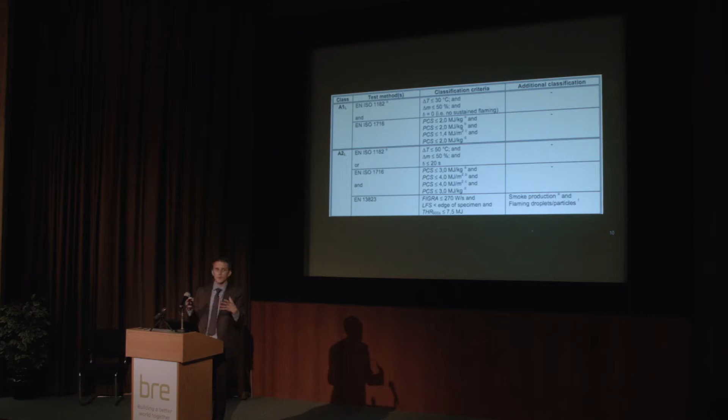So we have A1 up here at the top, and A2 down here, and this tells you the different tests you need to do to get your product to a certain classification. What you'll notice is that A2 has got an extra test in there, a corner test, an SBI test. The reason A2 has those additional categories is because there's an additional test conducted on that material. I suppose this illustrates that it may seem simple, we may look at something and think we understand it, but what's going on behind the scenes is potentially more complex, and we need to take great care before demanding or asking things, to make sure what we're doing has the appropriate technical background.

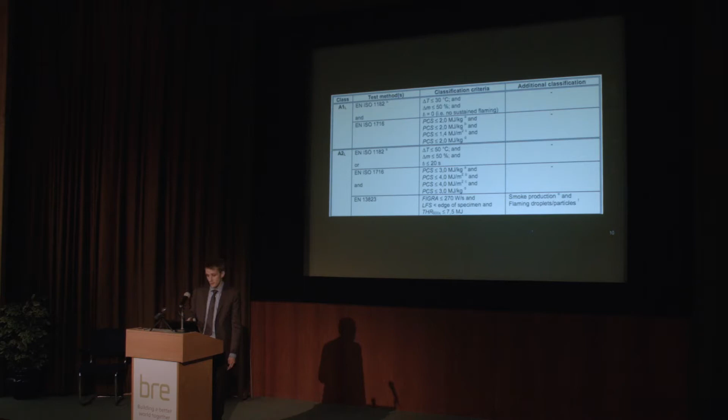But nevertheless, there's this distinction between A1 and A2, and it's essentially in this thing called the heats of combustion. The heat of combustion is the amount of energy a material can release when it's burned, so the number of megajoules per kilogram. The A2 material has an allowable heat of combustion of 3 megajoules, and the A1 material has an allowable heat of combustion of 2 megajoules. So you can see there's a difference between these materials.

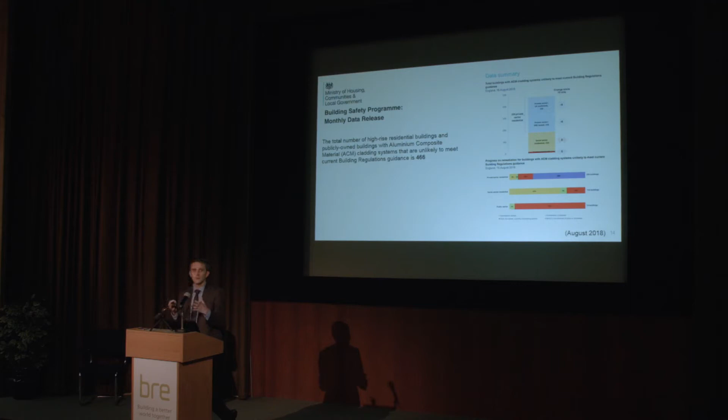So there's a big question, not necessarily on the new buildings, which is the argument currently taking place, but the existing buildings already built, which have all sorts of disparate types of cladding systems, maybe less extreme than those conducted as part of the DCLG tests last summer, but nevertheless don't meet the building regulations. What do we do with these buildings? I keep reading the press, and there are leaseholders subject to £40,000 worth of renovation work. Is that appropriate? Is that not appropriate? These are the kind of questions we really need to get a handle on to act in an appropriate way.

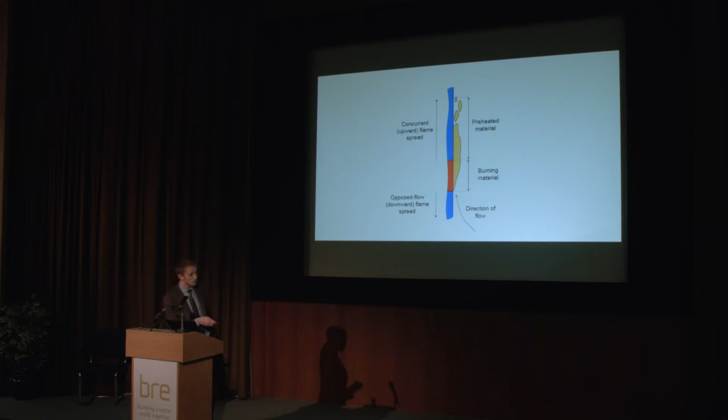We've got opposed flow fire spread, which is the downward fire spread on this diagram, and then we have concurrent flow fire spread, which is the upward fire spread. Those two types of fire spread are fundamentally different. One of them is governed by a very local condition taking place down here about how quickly energy is being transferred against the updraft, if you like, and the other is being driven by the preheating and the length of this flame as it's heating the material above it. That is a fundamental difference in behavior.

So really what we need to be able to do is understand - we want to know about the lateral flame spread, that's where a lot of classification testing comes from. But we also need to be able to understand this idea of vertical flame spread, upward flame spread, and what are the things that are controlling that?

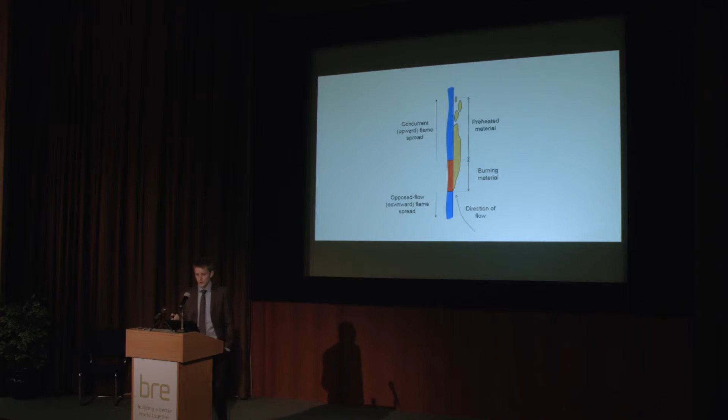This takes us to the kind of systems that we have been seeing a lot of recently - some very complex systems, build-ups of lots of different pieces of geometry, and I've simplified this down to the essence of what a common cladding system might look like. So you have some kind of existing structure, you overlay that with insulation, then you have a gap, an air gap to allow ventilation, and then you have the rain screen cladding sitting in front of this. This is what a lot of the debate has been about, and the different materials that are being used in these kinds of systems.

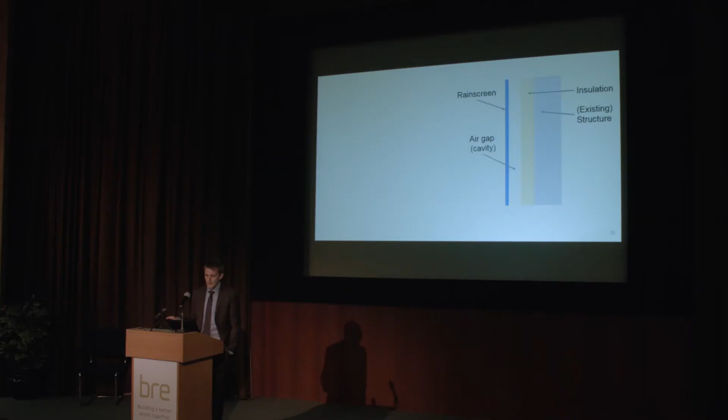So if we want to start understanding the performance of these systems, we have to start asking ourselves lots of questions about what are the things that might impact upon the way that system may or may not behave. Questions we could ask: what is the influence of the width of the cavity? If I was to conduct a BS8414 test, and I had a 50 millimeter cavity, and then I want to change to a 60 millimeter cavity, is that important? Does it matter?

Do I need to go and retest, or is my result fit for purpose as is? The location of the gaps between different panel assemblies, does that matter? Does it have an influence? The thickness of the different materials - if I change my insulation thickness, if I change my rain screen thickness, is that going to have an impact? The types of materials I'm using, what they're made of, is that going to have an impact? The combination of materials, how I put them together, does that have an impact? The fixing of materials, the mechanical way these systems are put together, does that have any influence on the overall fire performance? And Octavian was talking about cavity barriers a moment ago - the location of the cavity barriers and the way they're put together, does that have an impact on performance? There's a whole range of complexity in these systems that we need to understand if we're going to ensure relevant and appropriate application of test results. So this is where our research came in.

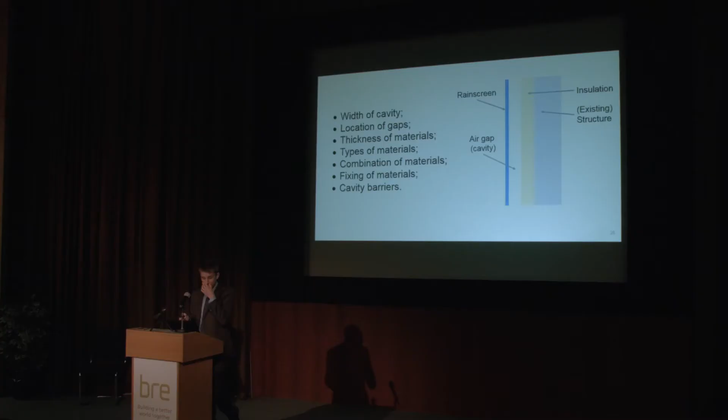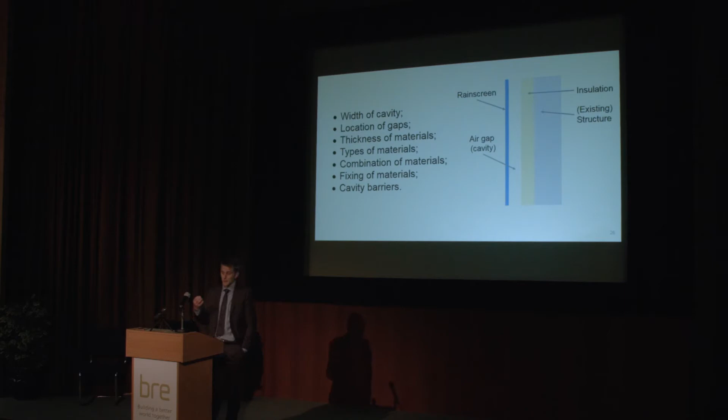We've been doing a lot of work in the lab. We have a lab up at Edinburgh, we have a furniture calorimeter, and we can do medium-scale experimentation - we've been doing that for a number of years on these kinds of materials. But really what we wanted to see is what's going to happen at the slightly larger scale. So I want to share with you some of the work we've been doing, so you can see the kinds of things we're pulling out from this research.

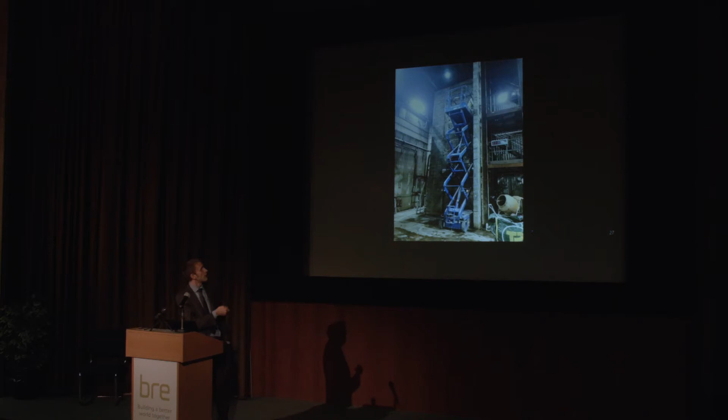We did the work in two phases, one in January, which was very cold in the burn hall, and one in May and June, as a team of 8 people came down for this research. We used this BS8414 rig as the basis for the start of our experimental build-up. We all learned how to drive a scissor lift, so I'm now a qualified scissor lift driver if you require any assistance.

We took a modular system - we created a framing system that we could mount lots of different combinations of material to, and we mounted this onto the wall. So what you can see here is the first of the frames going up. We did have a time lapse of this, but it's a little embarrassing because you can just see us forgetting our tools and having to go up on the scissor lift the whole time, so I decided not to play it. We can start to mount this system on the wall.

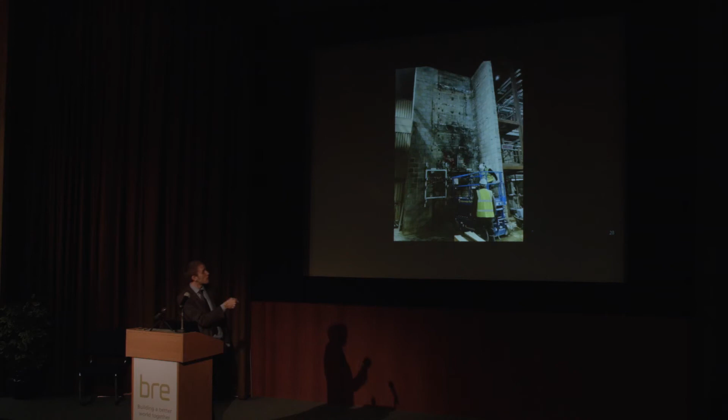David Farrington was delighted that we drilled a series of very large holes in his wall so we could fit our instrumentation through. This is the instrumentation going down the back of the rig behind the wall. We had around a little bit more than 200 sensors across the whole array. This is looking at it from the side - you can see each of the modules going up the height of the wall, and there's an absolute tangle of cables and tubes sitting behind the wall, feeding our equipment.

Then what we've done is overlay a sheet of PMMA onto that. Those of you who've done fire labs in the past will know PMMA well - it's plexiglass and is a very well-studied material in terms of its properties and how it burns. We wanted to take something we really understood how it burnt, but put it in a situation that was quite extreme. Then we ignite it at the very bottom, using the smallest ignition source we could get away with and still get an effective ignition - just a strip of soaked ceramic paper, soaked in heptane, so a very small ignition source.

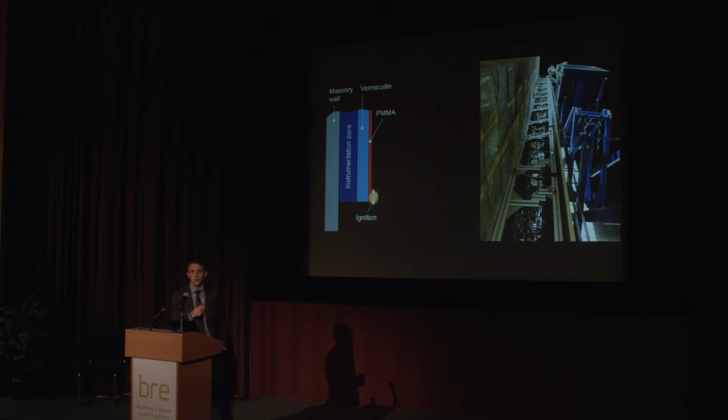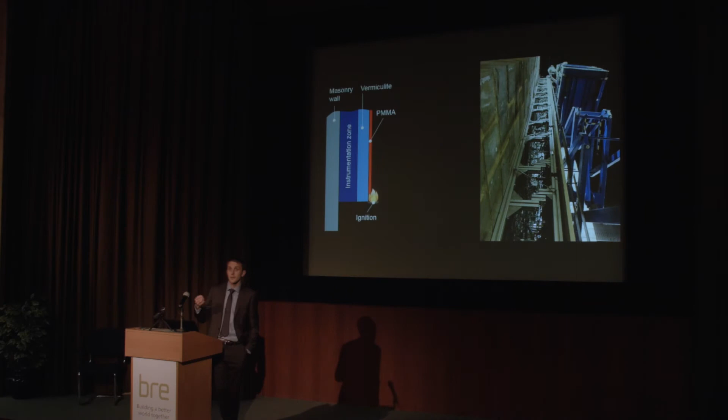So what I'm going to play you now is a video. It's worth saying that this system does not look like a cladding system - PMMA onto the vermiculite board does not look like a cladding system. What it gives us is a baseline. A lot of the experimental research previously conducted in this area really looks at fire spread on a single surface. So what we wanted to do is the kind of thing people normally do at 1 meter scale or 300 millimeter scale, but do it over 7 meters in order to get a baseline for the behavior of a very simple system, which is what we did. So hopefully we'll play a video.

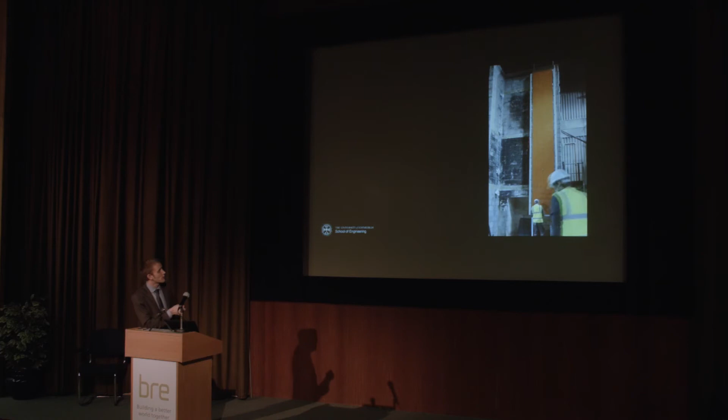What you can see here is actually the other rig, because this was the one in January where we occupied the other wall, but it was exactly the same system, just inverted. And I'm pleased to say there were no funny symmetry effects on this wall. We measured that, so we're very happy that we had a symmetric experiment.

So we've got 7 meters of PMMA. Each one of those is an individual panel that's just 1 meter high, and you can see there's a little black thing there. That's actually a pressure probe that's measuring velocity of the gas directly in front of the panel.

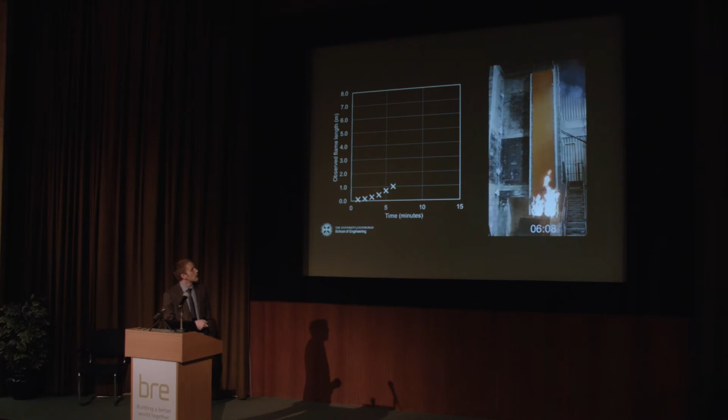So what you can see down here, 2 minutes in, 4 minutes in, we've got little flames at the bottom, and it's starting to get a little bit bigger over here. What we have here is the observed flame length, just eyeballing this from the video, and you can see the growth rate. Now we're reaching up to about 1 meter, 1 and a bit meters, I guess. And what you can notice here is you're starting to get an accelerating curve.

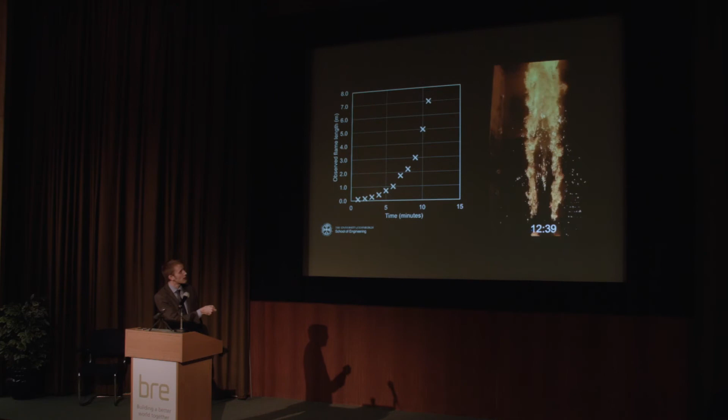By this time you've got ignition of almost the whole height, but not quite. And then you've just got this little bit at the top that's then igniting towards the very end there. What you can see at the bottom, we only have a 6 millimeter thick piece of PMMA, so at the bottom it's burning out, and by 12 minutes 39, you've actually had burnout across almost the entire height, except at the edge where it was restrained to keep it all in place.

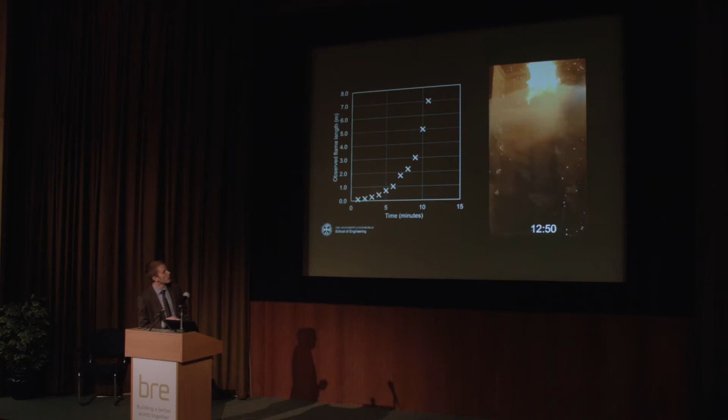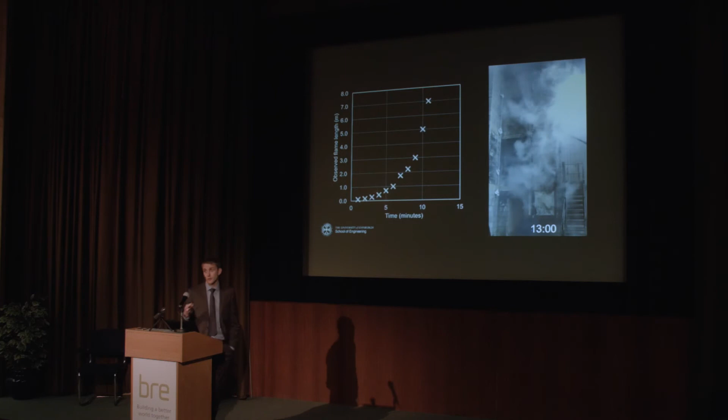At that point we got a little bit nervous about the roof of the burn hall, so we put it out. But what you can see here is exactly what you'd expect based on the fundamental theory of flame spread, in that we have a self-accelerating fire, an exponential growth rate. So that's our baseline case. No one's ever done anything, as far as I'm aware, quite on that scale before, in terms of the size of that experiment. But it's only the baseline.

Really what we now want to understand is what are the processes controlling the fire spread in something that looks a little bit more like you'd have in a real building. So this is the build-up that we then created—a very similar idea, masonry wall, our instrumentation zone. It's worth saying that's all our instrumentation going out the back of the wall. Actually a lot of it was coming through to take the readings within the samples themselves.

Then what we did is we used a couple of different insulation materials. We used a PIR, which is 100 mil thick with no foil—I'll explain that in a second—and we used a mineral wool material. Now, the reason we used no foil, and I was having this conversation with someone in one of the breaks, is that when we start to get into this territory, we've got a very complex system here.

We've got very complex processes governing the flame spread. What we want to do is simplify things as much as we can. So we already have an idealized setup, but also we don't want to be testing specific products—we want them to be as simple as possible. A lot of the products we have, particularly insulations, have a foil on them, and that introduces a great deal of complexity in terms of the way pyrolysis gas exits the material, creating a lot of uncertainty. We wanted a material we really understood how it was going to behave.

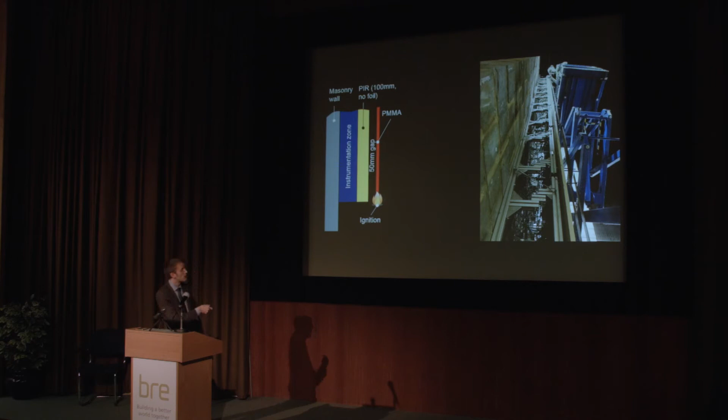So here we have just a material, not a product—PIR 100 millimeters thick, and the same for the mineral wool. Then what we did is we ignited the PMMA in exactly the same way, not the insulation material. So it's exactly the same ignition source sitting below the PMMA, but we ignited it on both sides this time because the PMMA is sitting out in the cavity.

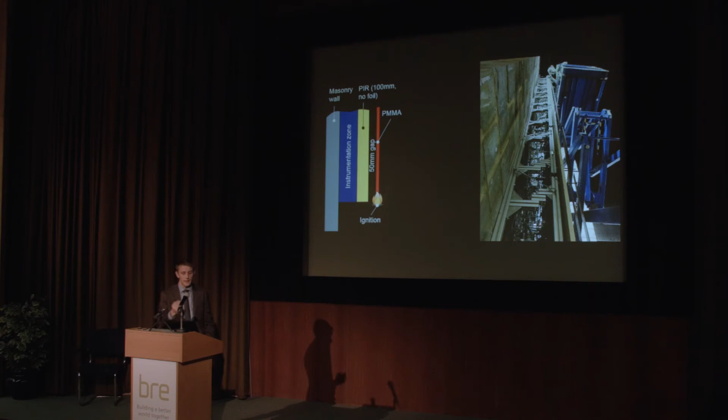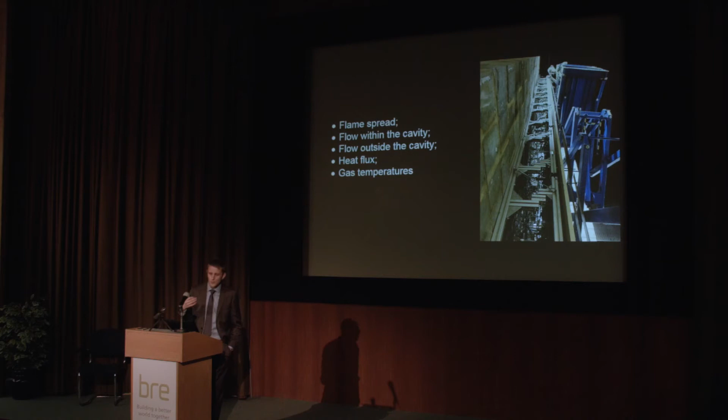Things we're interested in are the flame spread, the flow within the cavity, the flow outside of the cavity. We're looking at heat flux, gas temperatures—all of those things we're measuring the whole time we go along. Again, this is because what we want to do is quantify the processes taking place. This is my disclaimer.

Everything we used was a material, not a product, so no brand names please. I'm going to play you the video now, side by side.

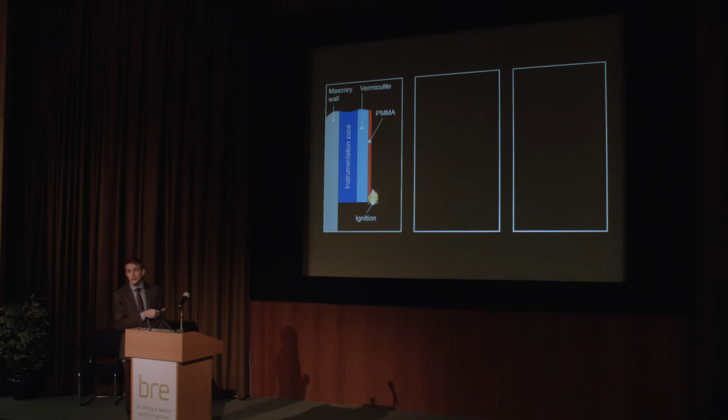The one on the left you've already seen, that's the one I just played you - that's no cavity, straight up. This one has stone wool insulation in the cavity, and this one has PIR.

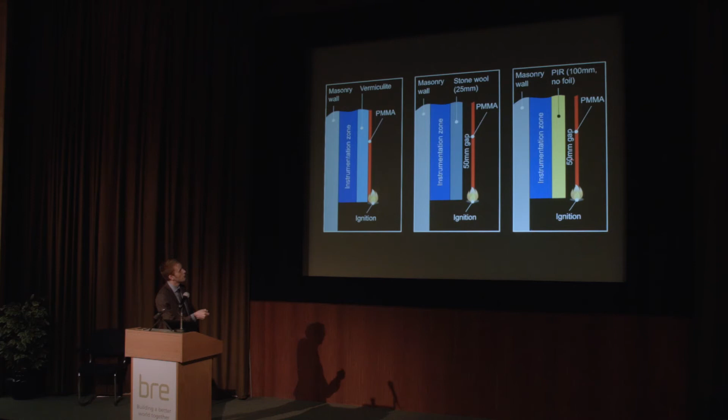So these are going to be replaced by the videos, and you can see the same ignition. This is PIR, this is stone wool, and this is just the PMMA direct, without a cavity. Now you can start to observe the differences in terms of the flame spread.

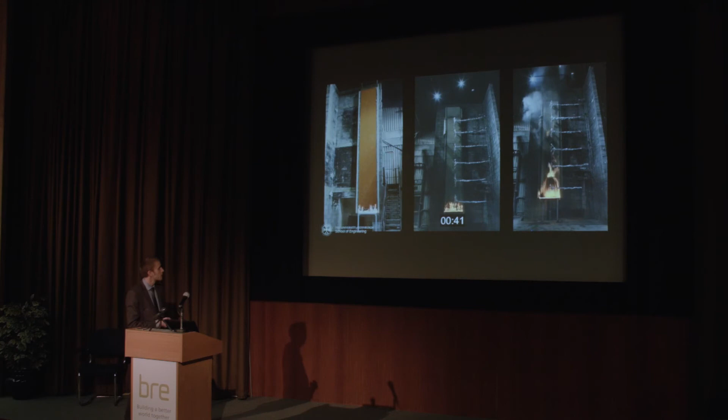This one is a little bit slower to begin with. This one is looking fairly similar at this stage, but suddenly at about 1 minute 30 it starts to accelerate a little bit. This one is obviously already well alight, with the vertical flame spread going upwards.

What you can also see are the streamlines here from behind the plexiglass, because it's transparent, so you're looking into the cavity. On this one you can see fire on the outside at the bottom here, and then fire on the inside as well.

By this time we're nearly at the top of this rig, and we're getting down to this one over here. By this point the PMMA is starting to melt and fall away, and as it falls away, the flaming is not really sustained on the PIR sitting behind it, because there's no heat source there to heat it.

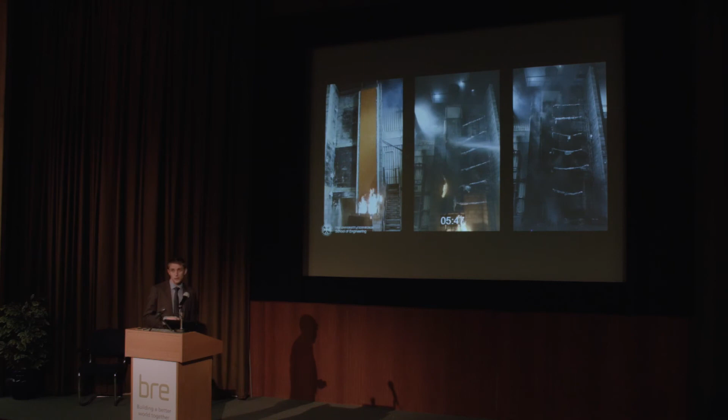At that point we realized our instrumentation was getting burnt at the back, so we put that out - it was just a pool fire on the floor anyway. In this one, a lot of the PMMA has already landed on the floor, so essentially what we have here is just burning at the edge of the samples, and we realized we'd actually lost our entire instrumentation at the back of the panel.

And then here we have, without the cavity, a video that you've seen before.

So coming up to the end of my talk - as always in research, we get some answers but we have lots of questions. What is the relative contribution of different materials here? When does the cavity matter, and when does it not? Which processes are governing the fire spread, and how can these be mitigated?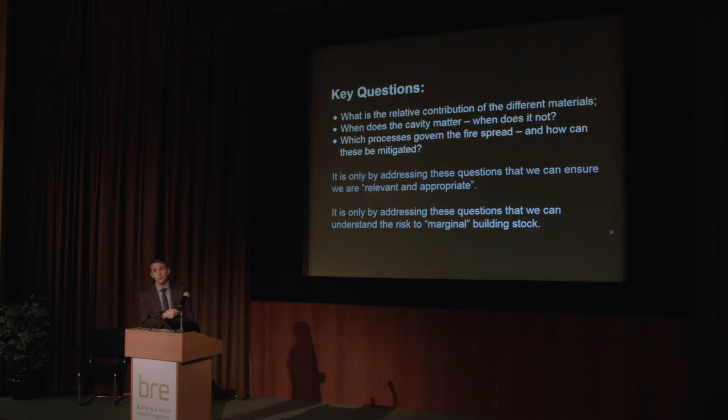All of the instrumentation used in these experiments is going to allow us to start quantifying those things, to actually start understanding the role of different processes and materials within the fire spread in these kinds of assemblies. It's my fundamental belief that it's only by addressing these kinds of questions that we can ensure relevant and appropriate interpretation of test results, and come to rational solutions for these buildings that are stuck somewhere in between, where nobody quite knows what to do with them. We're going to be able to provide some rational engineering answers to these.